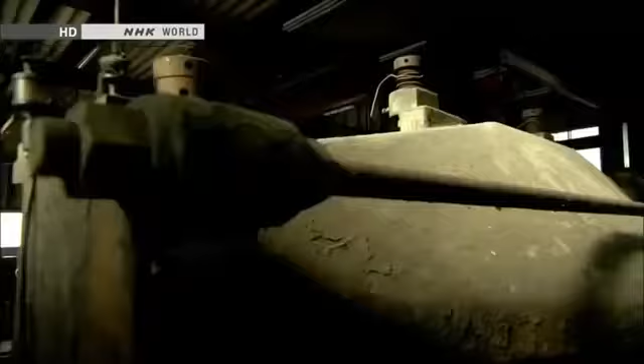In a workshop near Mount Fuji, a curious being has appeared. It's 3.8 meters tall and weighs 4 tons. It is a giant humanoid robot named Kuratas.

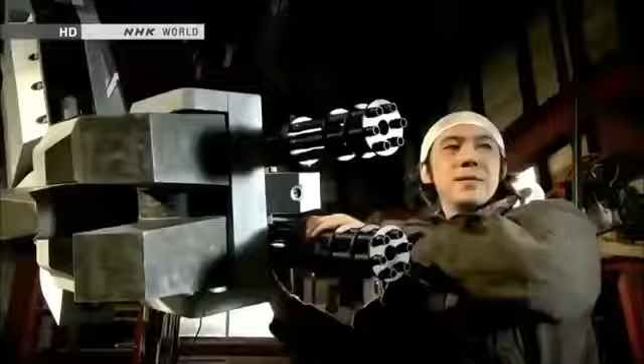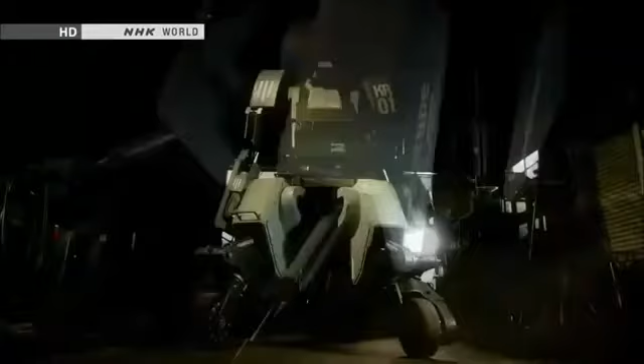Kuratas is a contemporary artist's creation. He holed up here for 2 years, building the robot with input from an expert. He calls Kuratas a work of art, but it's a sophisticated piece of machinery. A person seated inside can control the robot, move its limbs, and grab things. The artist says he was inspired by robots in science fiction tales and animation. That vision sustained him as he worked in solitude.

Things that were once unthinkable are becoming real. How will robots evolve? Well, military applications could be one option. They'll probably become more and more like humans. They could surpass us in strength and ability.

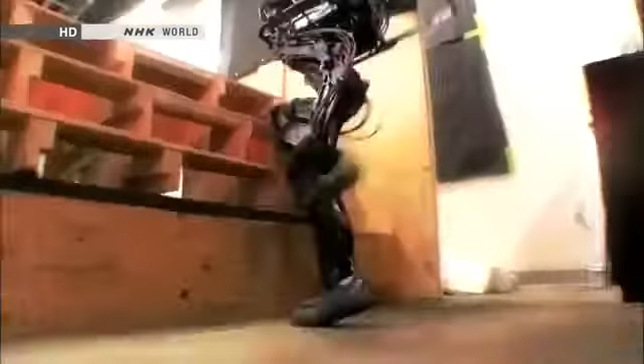People long dreamed of creating these extreme machines. Now, humanoid robots are here. They think like we do, move like we do, and even sacrifice themselves for us.

We want our robot to change society, because robots must be useful. Electronics and computing, progress in vision systems, there's many pieces of it. We will see much more capability continue to grow.

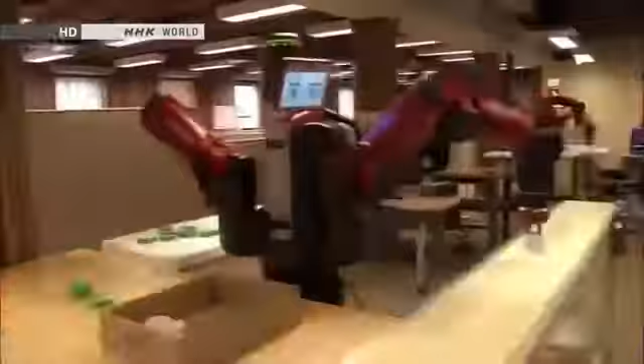Since the Industrial Revolution, people have entrusted some jobs to machines. But there may come a day when humanoid robots do much more complex jobs. Then, what will people do? You'll see more and more robots doing things in society, whether it's manufacturing or service applications or home healthcare applications. The key will be skillfully dividing labor between humans and humanoid robots.

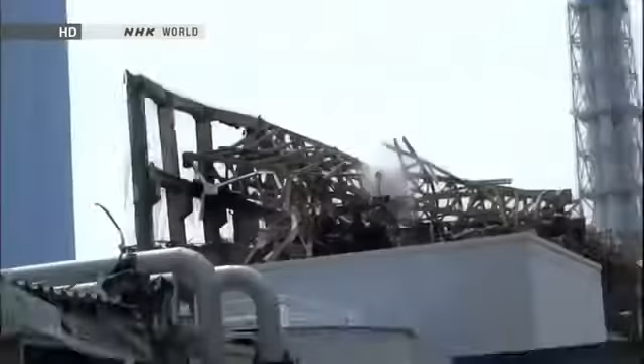The disaster that hit Japan in March 2011 accelerated efforts to develop robots with human traits. The Fukushima nuclear accident left people powerless. Robots can take over when things become dangerous. They can plow through rubble, climb ladders, even make repairs. People are turning to humanoid robots to handle all of these tasks.

We're eager to launch it soon to end the crisis. By joining forces, we can make a truly useful contribution. Only a humanoid could do it. Or the day will come when robots will really assist mankind.

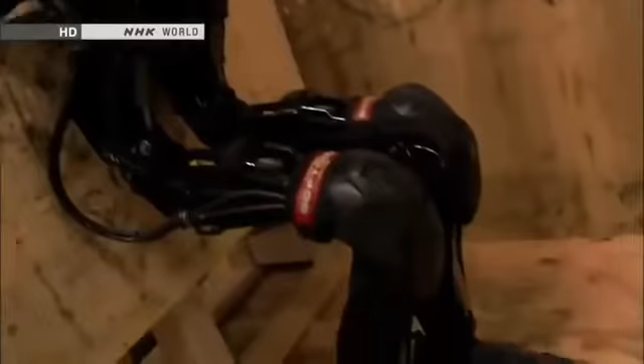The nuclear disaster in Japan sparked explosive advances in humanoids at the front line of robotics development. This program explores the future that's fast approaching.

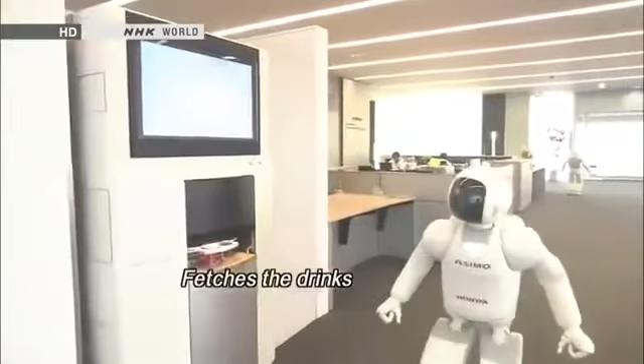ASIMO was created by Honda's research and development subsidiary. We were allowed to film their top-secret robotics laboratory. Japan is a worldwide leader in the development of humanoid robots. ASIMO is the country's crowning achievement. Engineers continue to make improvements.

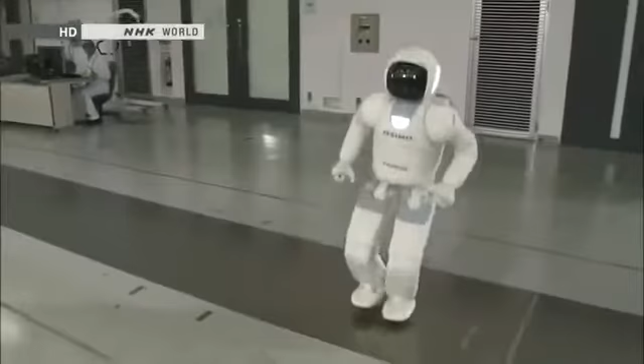ASIMO's most innovative feature is its advanced intelligence. The robot can think and act on its own without human intervention. That's made possible by sensors that replicate our 5 senses.

ASIMO's head contains 8 microphones. It uses them to listen and engage in conversation. 2 cameras work as eyes. They can detect humans and use stored data to identify them. A facial recognition problem? I don't think so. Please cover your face.

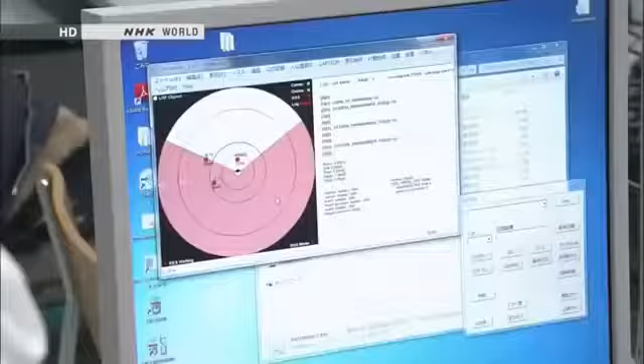ASIMO's artificial intelligence analyzes a vast array of information. That's how it understands people's requests and takes appropriate actions.

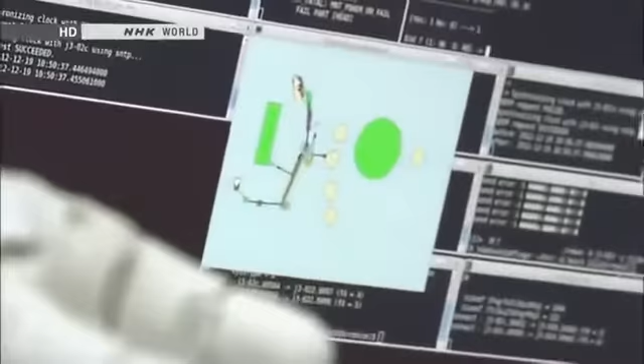ASIMO also has a sophisticated sense of touch. Its fingers can make subtle movements, like a person's. Sensors are embedded in the fingertips, too. They can gauge the hardness of an object, like human fingers do.

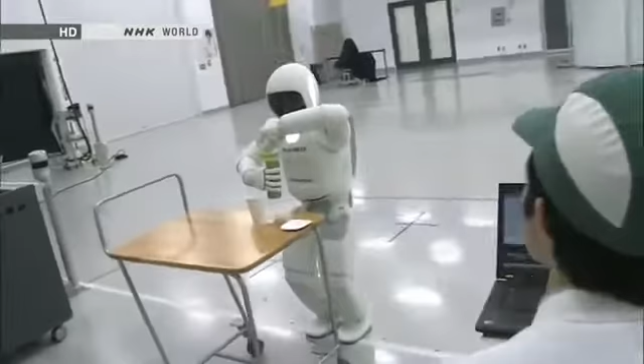Most robots use a fixed amount of strength to grab things. But ASIMO exerts more power to open a tightly sealed water bottle and less when holding a paper cup. Its artificial intelligence uses information from the fingertip sensors to adjust the grip.

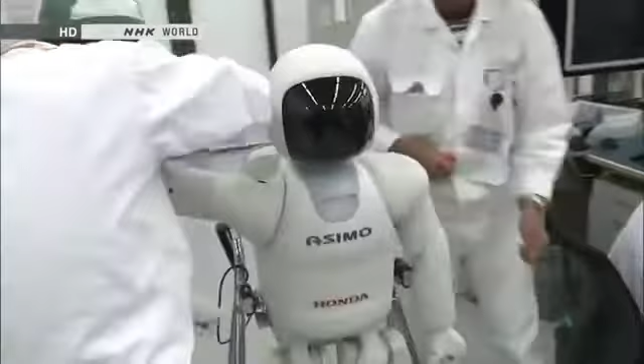The developer's ultimate goal is for ASIMO to be a valuable partner that coexists with humans. The engineers who created ASIMO all grew up watching animated shows about robots, such as Astro Boy, Doraemon, and Gundam. They dreamed of someday making their own.

Satoshi Shigemi is the development team's leader. He has been designing robots for the past 16 years. From the beginning, we wanted to design a robot that could help people. To realize that dream, we're constantly asking ourselves, what kind of robot would be able to change society, make people happy, and make life easier for people around the world? Our idea is to create a robot that will change how people live. We're working through the technological issues, one by one, in order to reach that goal.

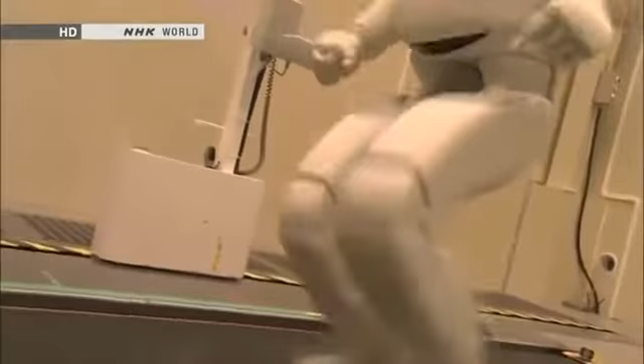ASIMO's advanced physical capabilities are revolutionary. The robot can walk and run. It can reach speeds of up to 9 kilometers an hour. For robots, walking is much easier than running. When running, both feet momentarily leave the ground. Balancing in mid-air is no easy task.

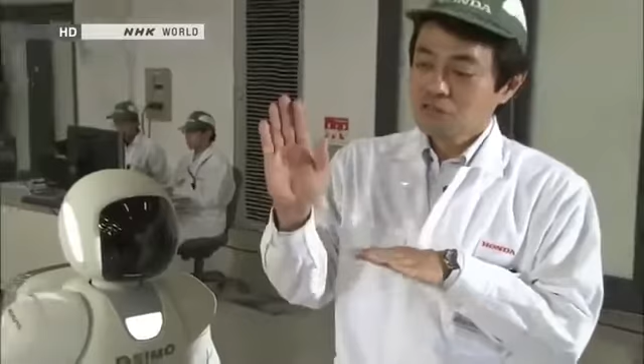Maintaining posture while jumping or floating in the air was a major technological breakthrough. ASIMO leans its upper body slightly forward to maintain overall balance. It goes forward straight in the air. Sensors in ASIMO's waist measure the robot's angle. It leans slightly to compensate, forward or back, side to side. That's how it stays perfectly balanced in the air.

ASIMO has been evolving ever since development began in 1986, much like a growing child. But something happened that made researchers realize ASIMO's real-world limitations.

It was the accident at Tokyo Electric Power Company's Fukushima Daiichi nuclear plant. The damaged reactors released radioactive substances, making it difficult for humans to deal with the crisis. People needed something that could confront the dangers and bring the plant under control. Robots.

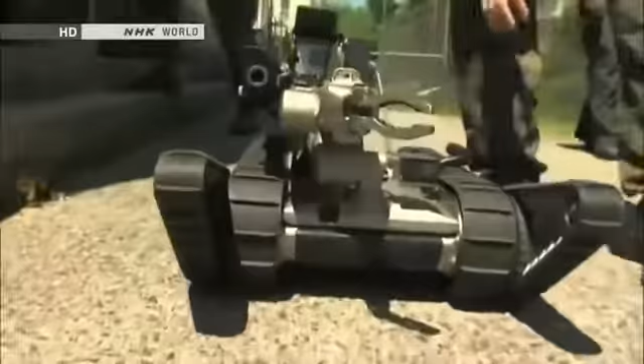Japanese officials sent a request for robots developed by the U.S. military. The robots were sent to Fukushima in April 2011. They recorded images inside the damaged reactors. Since then, a variety of Japanese robots have been enlisted as well.

Robots have proven to be useful, but 2 years after the accident, they're only used for inspections. They're not able to do all the work of humans.

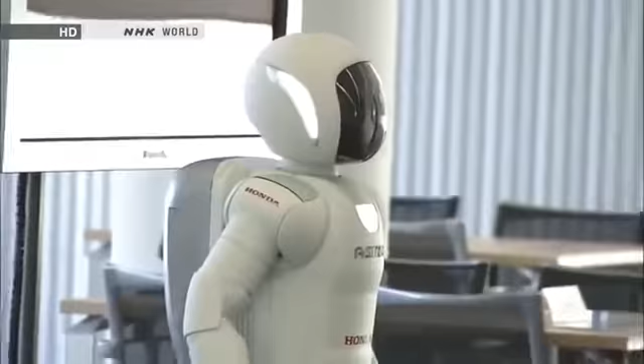What about ASIMO? Right after the disaster, people flooded Honda with phone calls and emails asking the company to send ASIMO to the Fukushima plant. But ASIMO wasn't up to the task. It could move nimbly over an office floor and other flat surfaces, but large vertical gaps and obstacles were a different story.

We heard from many customers. We ourselves regretted that ASIMO couldn't be of help. It was obvious that the ASIMO we had built wasn't ready for real-life action. We realized right away that we needed to make something different. Something new that could offer immediate assistance.

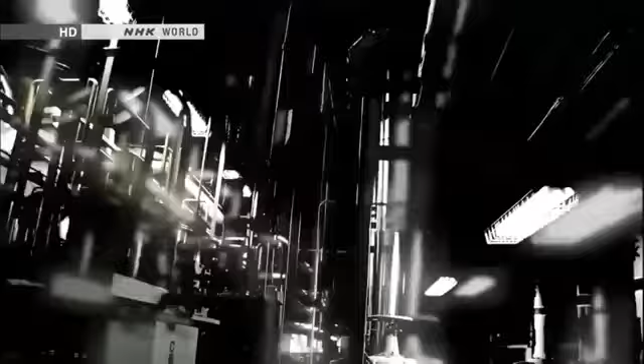Honda wasted no time. Company officials offered to create a robot free of charge to assist TEPCO in the recovery. TEPCO accepted. Officials asked for a robot that could open or close valves inside the nuclear plant.

We wanted to flush out radioactive materials that remained inside the pipes and bring down radiation levels in the facility. That was our first goal. Unless we opened or closed the valves, the area would remain highly radioactive, and that would prevent workers from entering the facility and impact the entire decommissioning schedule.

How many valves are there? Each unit has from several thousand to tens of thousands of them.

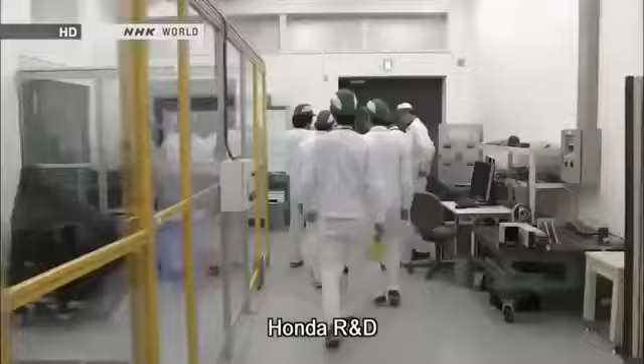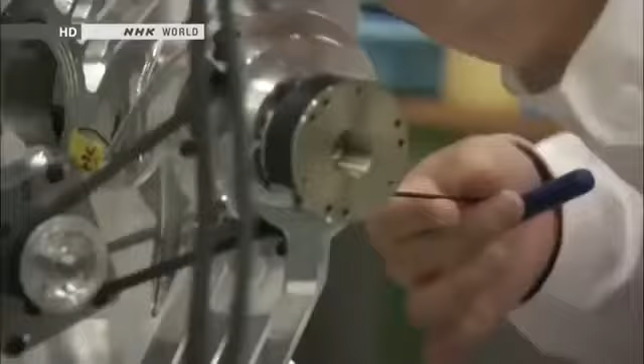In July 2011, 4 months after the accident, Honda began designing a robot for use at the nuclear plant. Members of the ASIMO team were put in charge of the project. A humanoid robot would take too long to build, so engineers focused on making a robot specifically for operating valves.

ASIMO was crucial to their efforts. Its ankles employ advanced balancing technology. Developers reasoned that using it would allow the new robot to work inside rubble-filled reactor buildings.

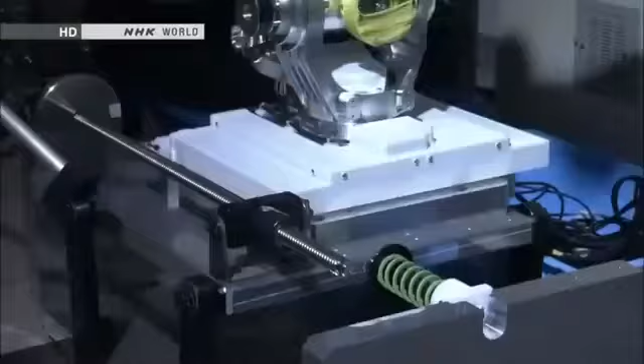The team worked exceptionally fast, completing a prototype in just 4 months. They turned ASIMO's leg into an arm for operating the valves. Even when the base moves, the arm remains steady. So far, so good.

Officials from TEPCO evaluated the prototype at the National Institute of Advanced Industrial Science and Technology. The government-backed group for cutting-edge research contributed to the development effort. A TEPCO official couldn't take his eyes off the robot's movements.

We may be quite demanding. That's okay. We might be quite direct. The test is designed to replicate conditions inside the nuclear plant.

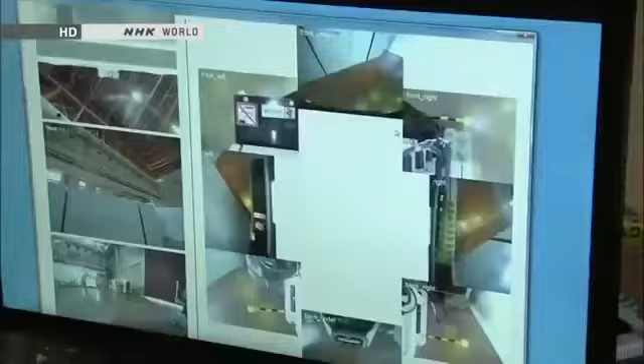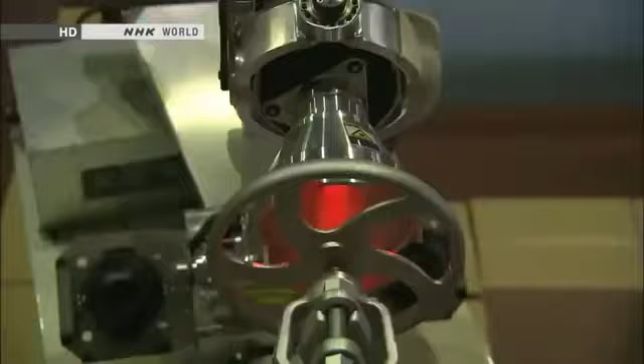The robotic arm is remote controlled. Testers send the arm toward one of the valves. There are a number of unknowns, including the condition of the valves. They may have rusted since the accident. A valve might break if the robot applies too much force, or it might not budge at all.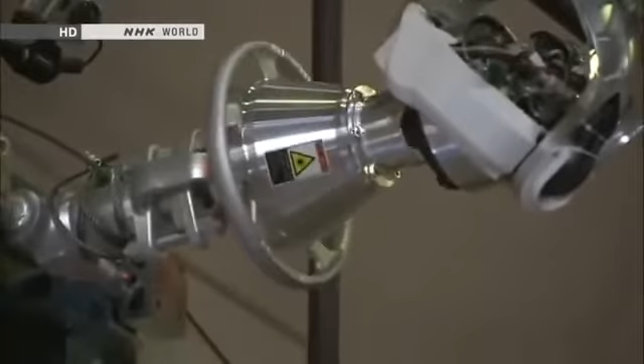The robot uses just the right amount of force and turns the valve on the first try. It's passed the test. This robot can do more than inspections. It could help in the recovery effort.

From what we've seen, the robot seems near perfect. We want to use it as soon as the need arises. It's important that we quickly do what we can to make that possible.

The Fukushima accident also encouraged U.S. developers to design emergency response robots. Department of Defense officials have spearheaded the effort. Before, they had shown little interest in humanoid robots. Now, they view them as vital for disaster response. The architect of the new strategy is Gill Pratt of DARPA. He oversees funding for leading-edge research at the Department of Defense.

There are many aspects of disaster response in Fukushima that inspire people in robotics to work on new capabilities. If they were able to take action during those first 24 hours, then the first reactor maybe would not have blown up in an environment that is too dangerous for a person to do.

What's important to us is that the robot is compatible with human environments, compatible with human tools, and also compatible with human operators without special training. As a result of that, the easiest form that comes to mind is the human form.

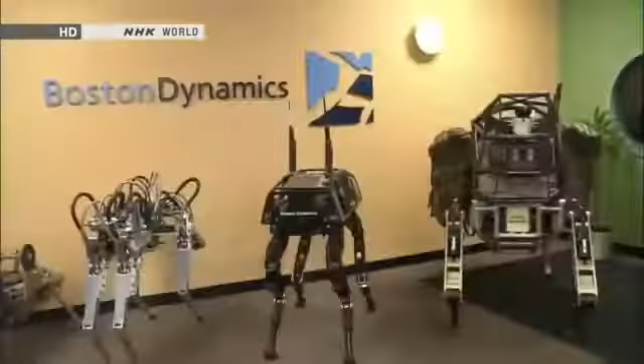DARPA is backing the development of a humanoid robot for catastrophes, such as nuclear power plant accidents. This company is leading the development work. It has already built several military robots. Okay, I'll show you the current status of the robot.

This is the first American-made humanoid robot for disaster response. It's called Atlas. Before, U.S. designers had focused on robots with specialized functions.

Why the sudden interest in humanoid robots? Traveling over debris, prying open valves, using tools for repairs. Performing multiple tasks like these is impossible for specialized robots. Crises also require robots that can navigate doors and stairs. Humanoid robots are ideally suited for such situations.

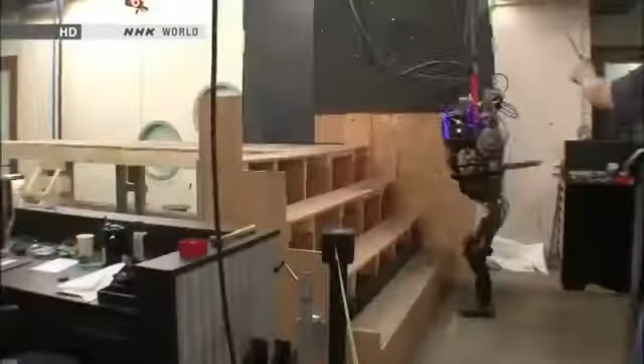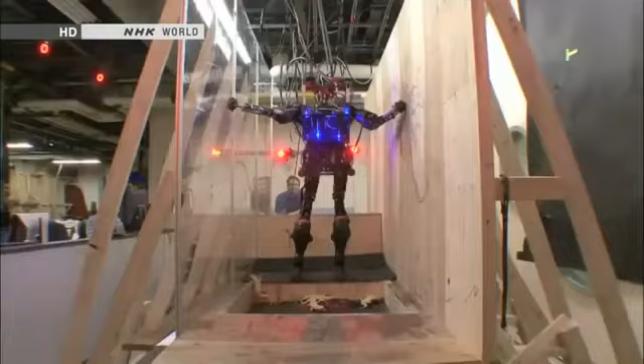Tests of this prototype were going smoothly. It can easily climb stairs and jump from a height of nearly 1 meter. It can negotiate obstacles using its arms and legs. It can already handle more demanding environments than Asimo can.

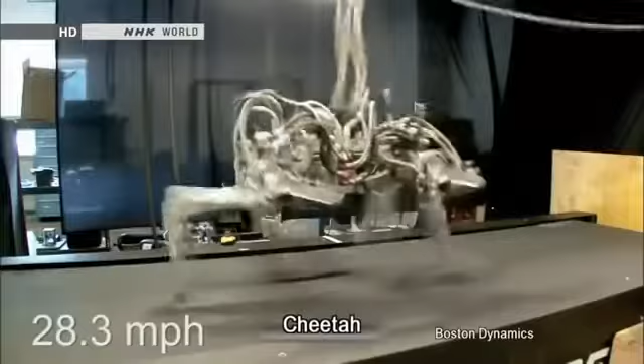Atlas is loaded with technologies originally designed for military robots. A quadruped robot called Cheetah can race through a battlefield at 45 kilometers an hour. LS-3 is for transport. It can carry heavy supplies for soldiers.

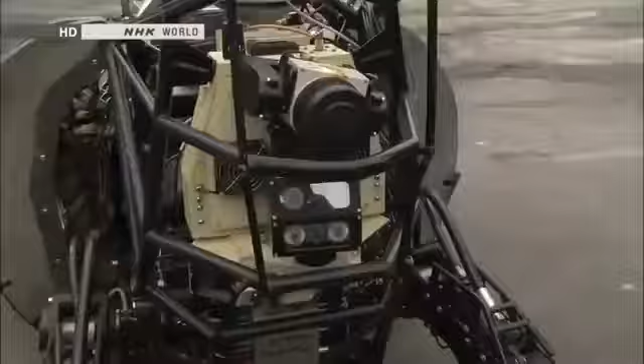The ferocious-looking robot gets its strength from a powerful hydraulic drive system. A hydraulic device can be small, yet quite strong. The black cables convey hydraulic power to the legs, generating the brute force required for harsh conditions on the battlefield.

A web of hydraulic cables covers Atlas's body. They form a muscular suit of armor for clearing debris.

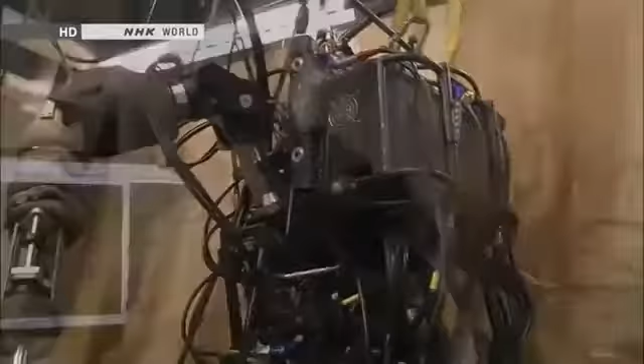Another important technology comes from military robot engineering. This machine's joints have a wide range of motion, allowing for flexibility that humans can't achieve. Atlas's joints are capable of moving in 28 different ways. Atlas can crawl through narrow spaces and withstand sudden shocks.

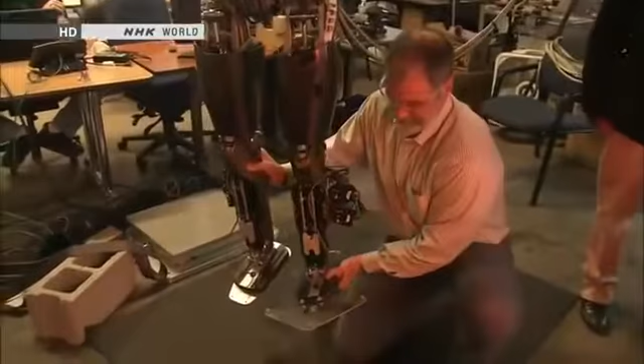Then we have the knee. This has 3 in the hip, just like us. This way, and then this way. I am very impressed with the number of degrees of freedom.

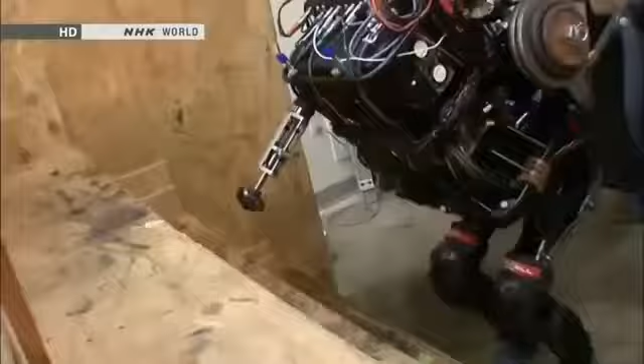It will be able to do these human-compatible tasks without a lot of the limitations that other robots have. Engineers will combine Atlas's rugged body with sophisticated artificial intelligence that's almost near completion. They aim to complete the robot by December of next year.

One reason you see humanoid robots is because there's some people working who are really interested in robots as an entertainment thing or as a performance thing. I think that's different. We're much more interested in basic capabilities for emergency response, rescue. So I don't think Asimo has been designed to do those things yet.

U.S. engineers stepped up their efforts to develop humanoid robots after the nuclear accident in Japan. Japanese researchers are embracing the same mission.

In November 2012, robot engineers from around the world gathered in Osaka for an international conference on humanoids. Gill Pratt from DARPA was one of the participants.

He came to invite engineers to join a project sponsored by the U.S. Defense Department. March 11th, after 24 hours, if only a robot had been there to go and open that valve, the entire disaster could have been averted. But we didn't have one, and furthermore, we didn't have anyone that could do the job. So shortly afterwards, we actually started planning the DARPA Robotics Challenge.

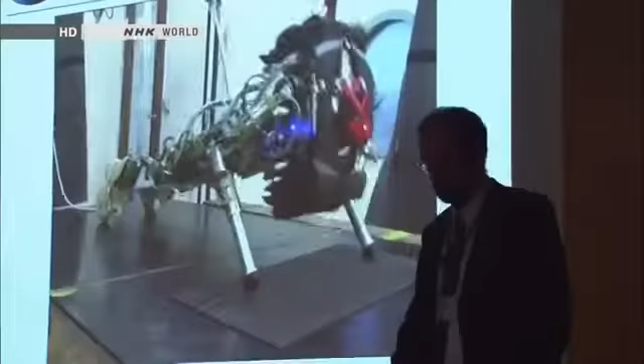They have 2 degrees of freedom, not 1. The Robotics Challenge is a competition to develop emergency response robots for major disasters, like Japan's.

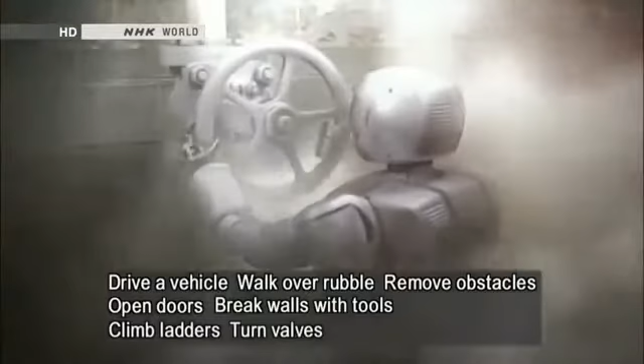The challenge consists of 8 tasks: driving a vehicle to approach a disaster site, walking over rubble, removing obstacles, opening doors, using tools to break down walls, climbing ladders, turning valves, and making repairs.

A single robot must complete all 8 tasks. The development period is 2 years. DARPA will provide contestants with funding of up to $4 million.

DARPA has received over 100 proposals from research groups worldwide. They include renowned organizations like NASA and MIT.

Japan is at the forefront of humanoid robotics engineering, yet its researchers hesitated to throw their hats into the ring.

So actually, to me, it's difficult not to see that some of the results of DRC are going to be used to advance, as you say, advanced military technology. The DRC is about developing robots that I believe wholeheartedly are completely impractical for military purposes, for offensive military purposes.

Will the technology that we come up with find its way into military systems? Probably yes. But I guarantee you that if you work on a robot for healthcare, there's a chance that that technology will also find its way into military systems.

The members of one Japanese research institution wanted to take part in the competition.

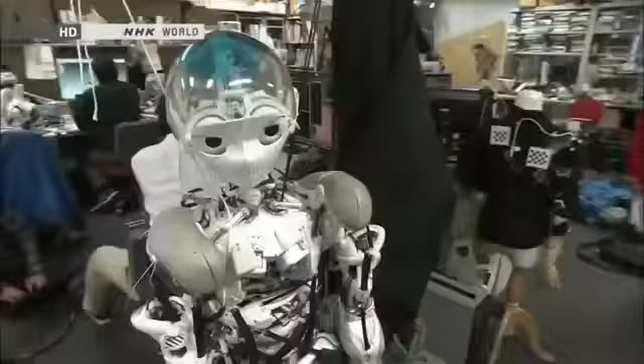They worked at the University of Tokyo's robotics lab. Researchers there, along with those at Honda, are global leaders in robotics engineering. But they faced a major obstacle to competing: the university bans military-funded research.

Three researchers made a decision. They told the university they were leaving. Then they decided to set up a venture company and enter the DARPA Robotics Challenge. They couldn't shake the feeling that they should leave their quiet university lab and help resolve the nuclear crisis.

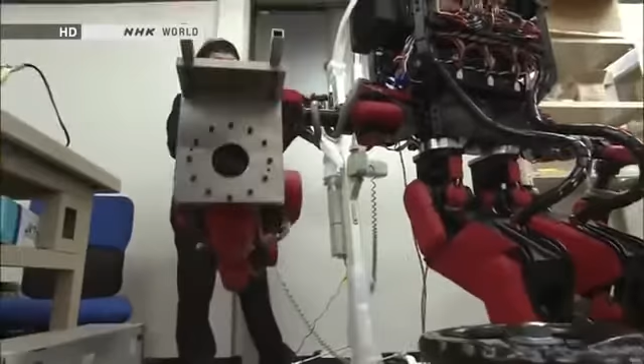Six months after launching their venture, the team had just completed a prototype with help from university graduates. Its long arms can exert 10 times more force than those of conventional humanoid robots.

It's too tight to turn with one hand. It can easily turn a valve that's too tight for a person to turn. The strong force comes from a large electric current that pushes the motors to their maximum limits.

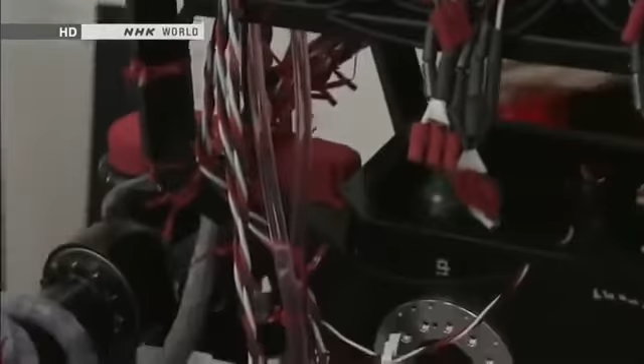A reddish fluid circulates through the robot's body. The fluid serves as a coolant that keeps the motors from overheating. The cooling system should enable the robot to perform hours of grueling work at disaster sites.

The time has now come for the developers to apply their years of research to the real world. A nuclear crisis has happened here in Japan. Radiation is escaping. Researchers in every field must wonder at least once if the technology they've been working on could help resolve the crisis. By joining forces, we can make a truly useful contribution. It's with this in mind that we decided to enter the competition.

One country is quickly catching up with Japan in humanoid robotics: South Korea. KAIST is a government-funded lab for the advancement of science and technology. Researchers there were among the first to express interest in DARPA's Robotics Challenge.

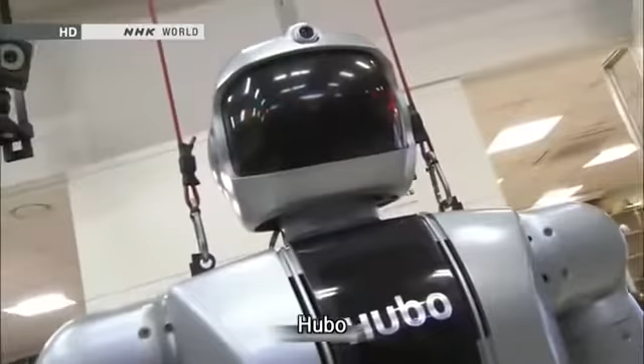This humanoid robot is called Hubo. It's modeled on Asimo, which Honda spent 14 years developing. Hubo was built in just 5 years. Hubo deftly manipulates its hands, and it's also good at dancing. Its moves look just like Asimo's.

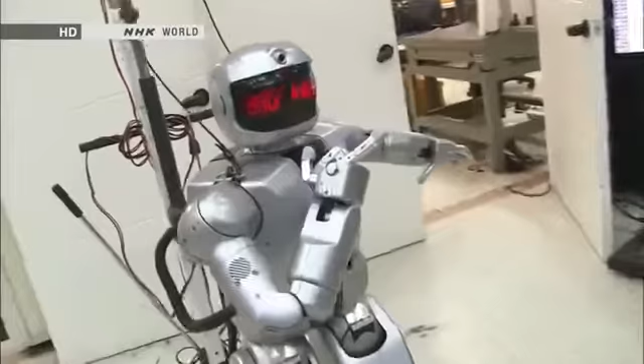Hubo has been undergoing a major upgrade ahead of the competition. It can now bend backward at the waist while walking to handle all kinds of environments. It can quickly pick up tools. The tests were going well.

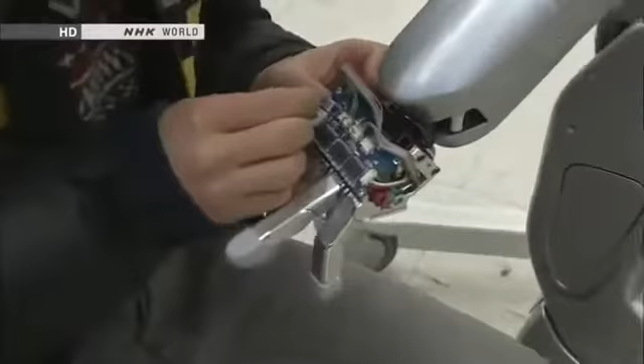People have always compared Hubo to Asimo. Engineers now had a strategy to get ahead of the Japanese developers. They decided to publish certain details about Hubo's design and pursue joint development with researchers at other institutions. One could say that this space inside Hubo's chest captures the heart of their thinking.

It's empty now, but this is where artificial intelligence will be installed. It's removable. Hubo does not yet possess artificial intelligence. Its motions are as sophisticated as Asimo's, but Hubo's movements are all pre-programmed.

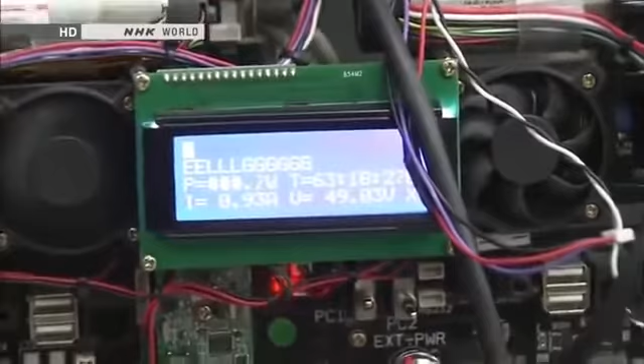U.S. universities that lead research into artificial intelligence will develop a brain for Hubo. The stage has been set for a joint U.S.-South Korean team to compete in the DARPA Robotics Challenge.

Sharing is the key to making technological advancements. That's true in South Korea and in other places too. Research shouldn't be confined to one place. People developing humanoid robots elsewhere are too close-minded.

Researchers at Honda were also invited to enter DARPA's competition, but they declined. Their energies were focused on designing a robot to tackle Japan's nuclear crisis.

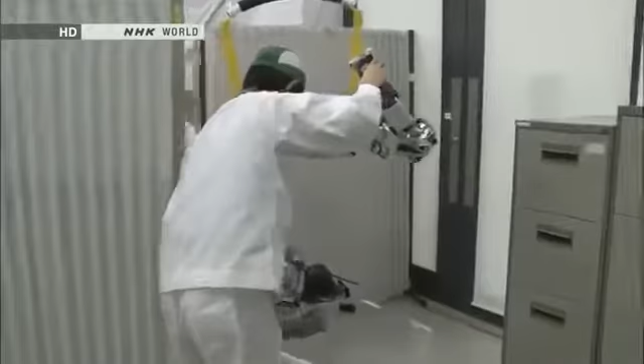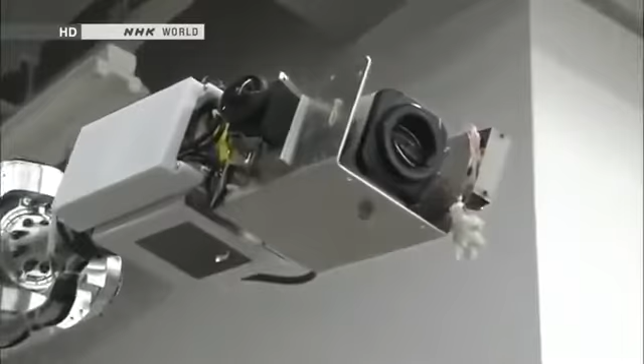Nearly a year has passed since Honda's robotic arm passed evaluation tests, but the device has yet to be deployed to the nuclear disaster site. That's because officials at TEPCO requested a change in specifications. Engineers have replaced the valve-turning hand at the end of the arm with a camera.

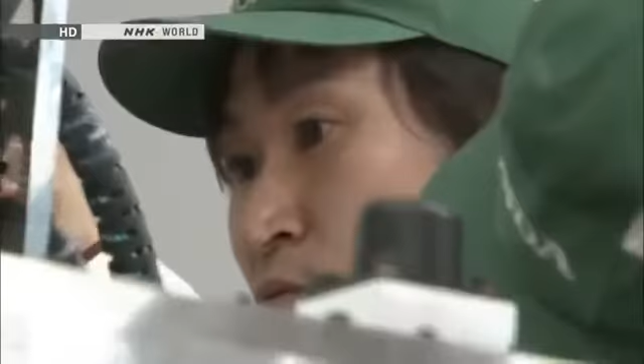TEPCO had changed its plan. Officials decided to put priority on assessing conditions inside the plant's facilities. They said it was too early to have robots work on valves. There wasn't even a recovery plan in place when we were working out the valve manipulation tasks.

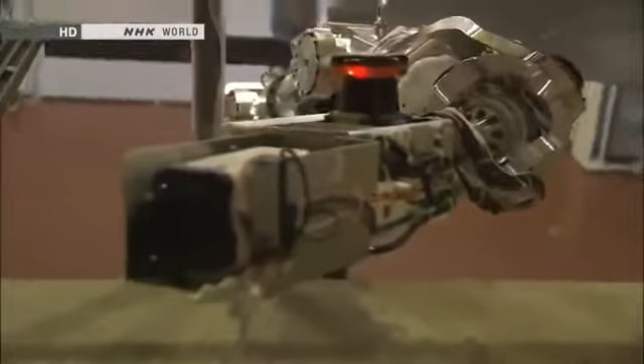The robotic arm will soon be sent to the accident site. It will provide the first images filmed from high up. The robotic arm was not the end of Honda's efforts. Its engineers had another secret mission.

They would develop a new humanoid robot, an updated version of Asimo for use in disasters. The site where the Fukushima disaster took place is dark and off-limits to humans. Only a humanoid robot with both intelligence and motor skills could climb over the debris, get to the accident site, and perform the work of people. In other words, a robot like Asimo.

Let's use our skills to make a humanoid robot that can tackle disasters. Asimo's engineers were united by this idea. The robot they envisioned would not only walk, but also use its arms to crawl. It would use every means possible to reach its destination. A dramatic update would be necessary.

A disaster reduction robot would be useless if it couldn't get to the site. It's important to get to the scene no matter what. Disasters create all kinds of debris that crumbles easily or breaks when stepped on. It's because it's dangerous that robots replace humans. That's what makes them valuable. A robot that couldn't get to the scene would be totally useless.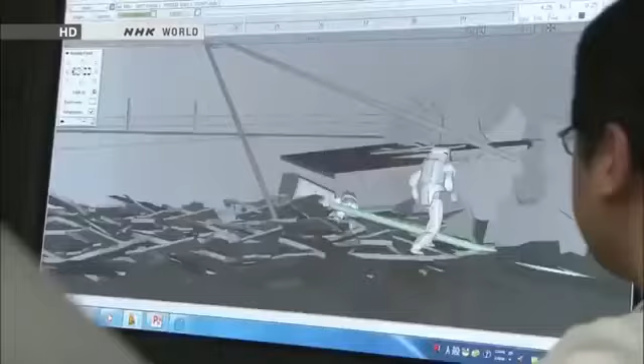Honda's engineers began developing robots in 1986 with the goal of making people happy. 27 years of research is now being put to the test. As we saw in the Fukushima Daiichi crisis, the bottom line is that robots can stand in for humans in places that we can't go to or that are too dangerous. I am committed to delivering what's needed, when needed, in the shortest amount of time.

The accident in Fukushima spurred the development of humanoid robots around the world. The disaster also prompted people to question the roles of humans.

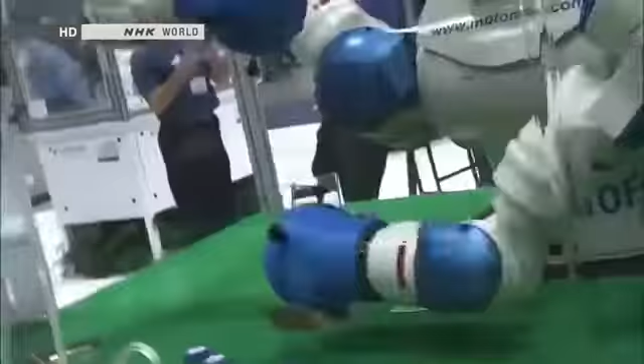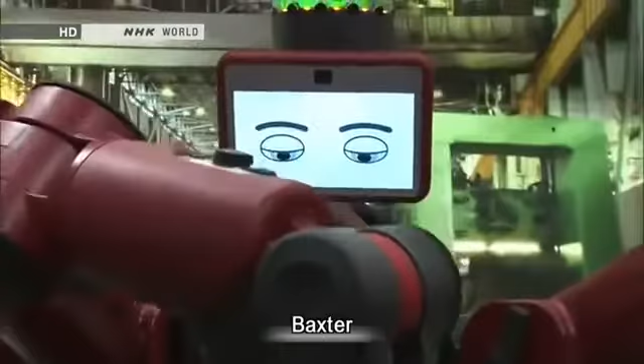One of the largest trade fairs featuring industrial robots took place in January. Global manufacturers displayed their latest models. Companies are developing more and more two-armed humanoids for industrial use. One new product at the event caught a lot of people's attention. Baxter was created by the inventor of a best-selling cleaning robot. It's equipped with sophisticated artificial intelligence, designed to work side by side with people in factories and other settings.

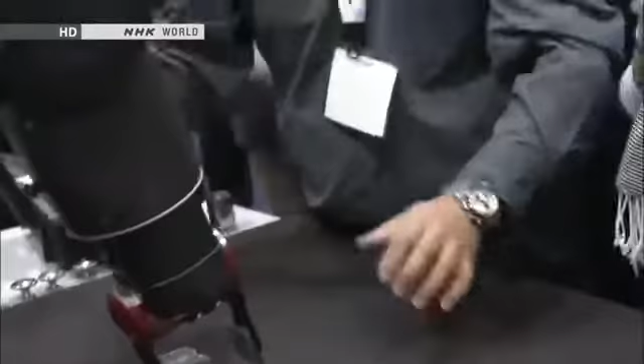The robot's most unusual feature is its ability to master a task in a matter of 5 minutes. All that's required is step-by-step manual instruction. No complicated programming is needed.

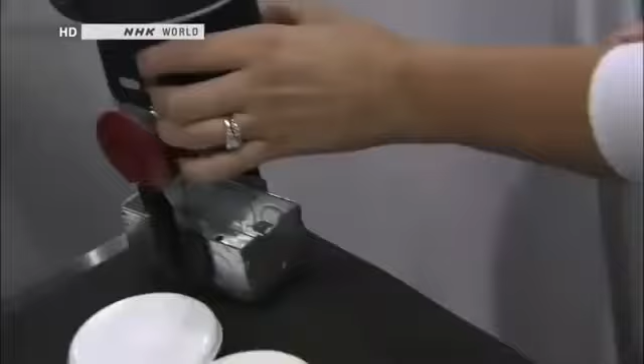Let's pick up this part. So you bring the arm to the part. Yep, just like that. So we have the part, close the grasp. Yep, grab the arm and bring it to the table. So you just pick, either pick or place. At this point, you're already able to do the task. If I can move that over there, it's going to look for the object. You can do this task back and forward, and you've already built some common sense. You really need to grab Baxter. You'll eventually have possibilities for that. We can do it ourselves. Sure.

The expression of the face on the LCD screen shows whether or not the robot has understood the task.

Baxter costs $22,000, a bargain for a humanoid robot. The maker says buyers can recoup their investment in several months and slash labor costs.

I'm very impressed with it. I work for a small manufacturing company, and we have some older employees who are looking to retire. There's some tasks that Baxter could do for us very effectively, and it would be cheaper than employing a person. It's not going to get tired, it's not going to need to stop. It'll keep running while everybody else is taking their lunch.

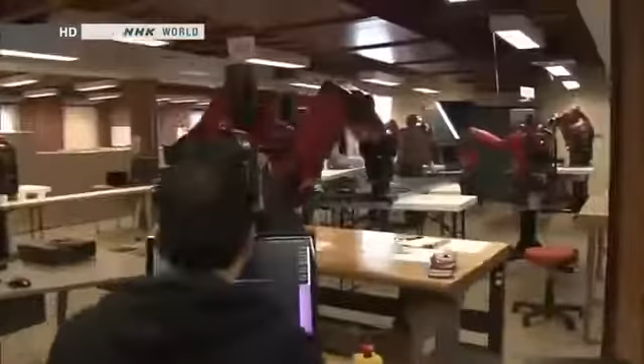The Boston-based manufacturer has a flood of back orders. Officials say someday Baxter will work at places like coffee shops, taking orders and grilling burgers. Eventually, they expect to have 500,000 U.S. customers.

Today we're focused on manufacturing, and there's a very big opportunity in manufacturing, but there's lots of other places a robot like Baxter could go. We had the Industrial Revolution at the turn of the last century. We've just gone through the computer revolution, effectively at the turn of the most recent end of the century. We are now into the robot revolution.

Will people and robots someday compete for jobs?

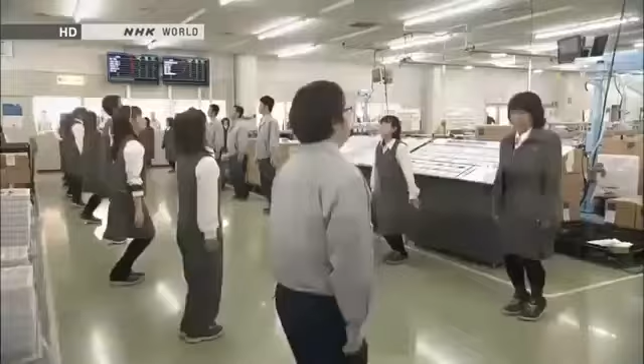At 8:30 one morning, a group of new employees takes part in daily morning exercises. They are 13 humanoid workers called Nextage. This company began using the robots in earnest last year.

They have 2 eyes and are just like humans. They're cute!

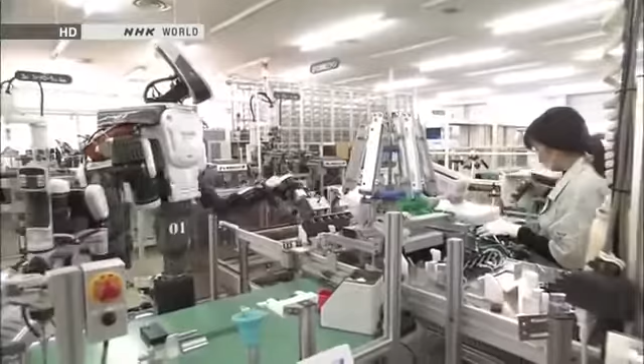This factory manufactures money sorting machines for cash registers. The humanoids work on a production line that was previously manned entirely by humans. The robot visually confirms the parts set in place by a human worker, then it begins its task.